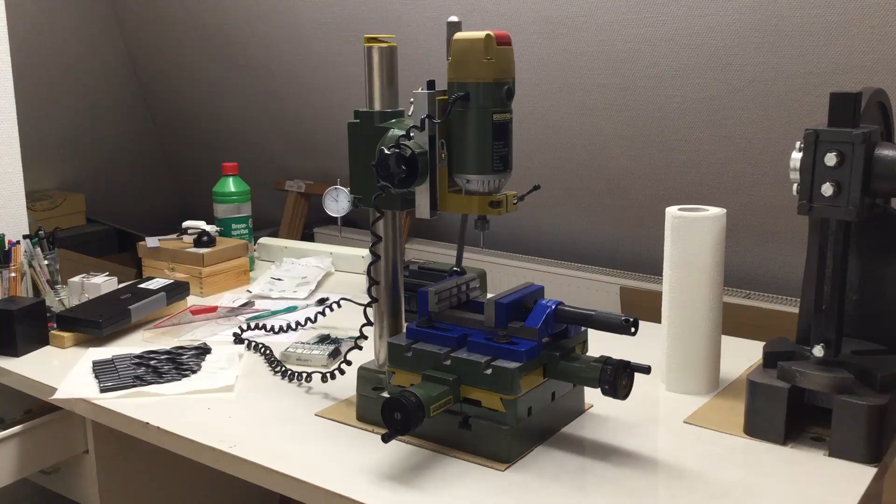We already had a small project last week where we made that little pointed shaft for visual alignment of parts on the scratched lines.

However, before we continue with our main project, I need to make, or at least I want to make, another enhancement to my Proxxon milling combo here.

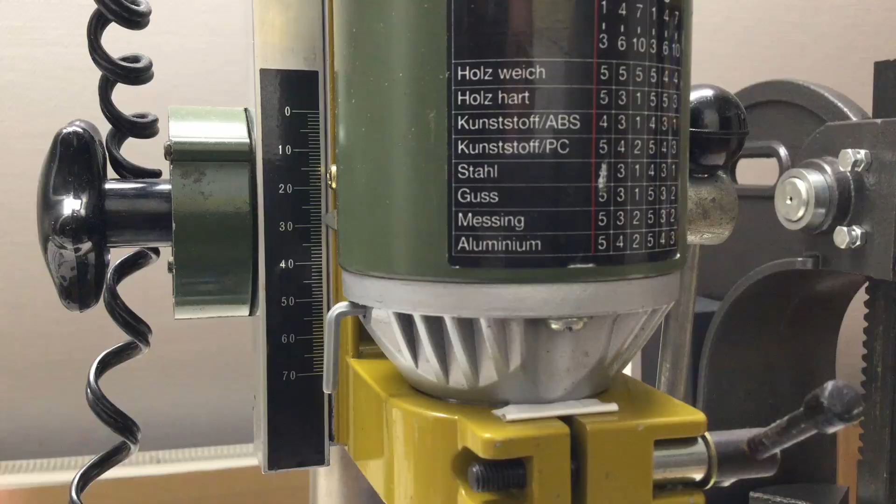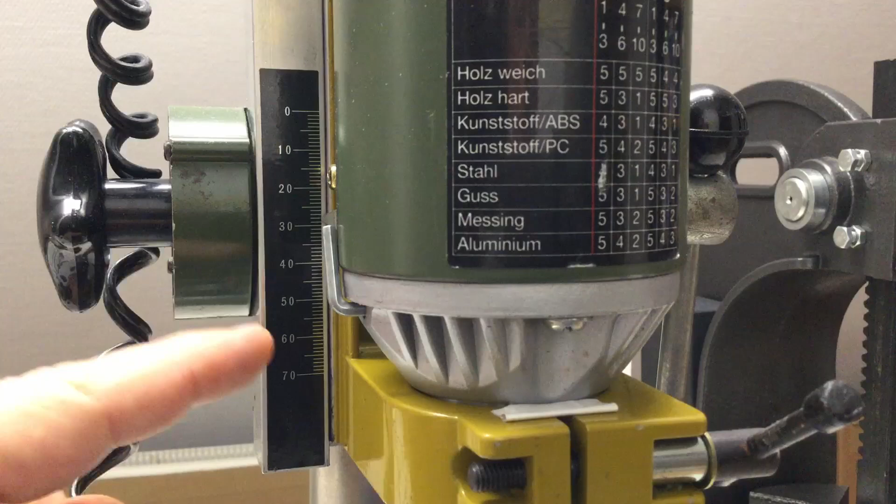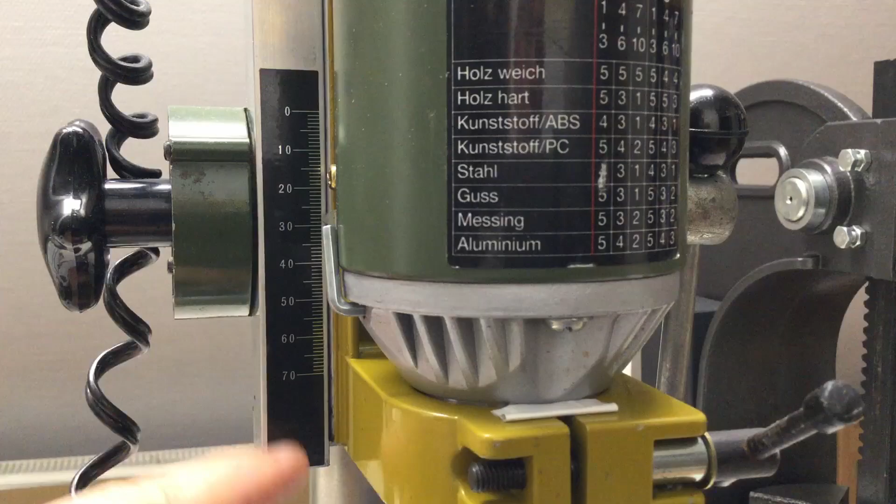The Z-axis of that Proxxon milling combo can move 70 millimeters, which is quite good. However, what if you want to drill a hole 65 millimeters deep, and maybe counting the tip of a drill, a total of 70 millimeters down? And suppose you want to do that in very fine steps, starting with 8 millimeters and slowly going up to 16 millimeters, at the end in half millimeter steps with the drill diameter.

Because officially that Proxxon milling combo, drilling combo, can only drill up to 10 millimeters, so you have to be very gentle with it.

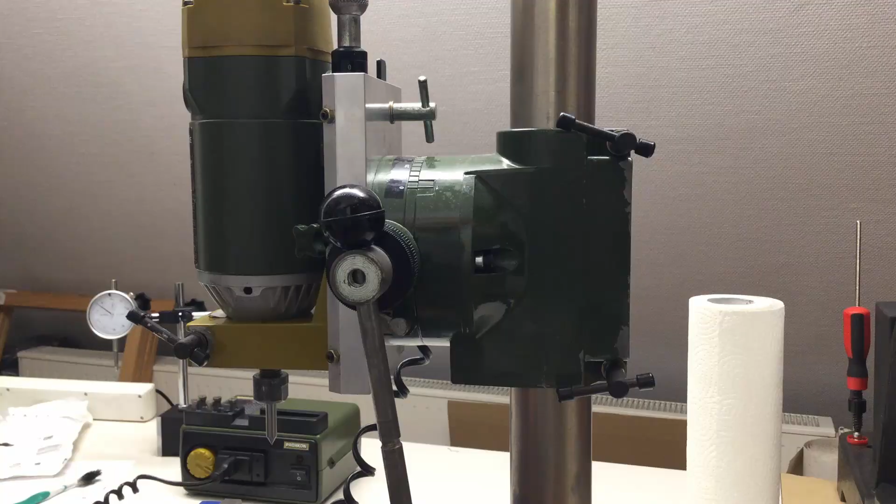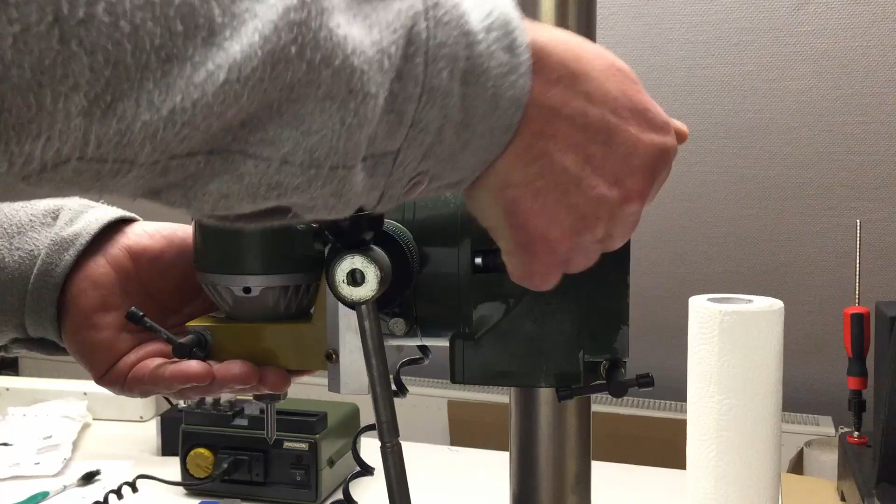But what's even more problematic is that you have to reposition the head on the column each time you change a drill. And here comes the drawback of such a small setup: that head can freely rotate on the column. There is absolutely no guide. So if you move the head up and down, chances are you lose your position on your piece. And that's the problem I want to solve today, or at least try solving it.

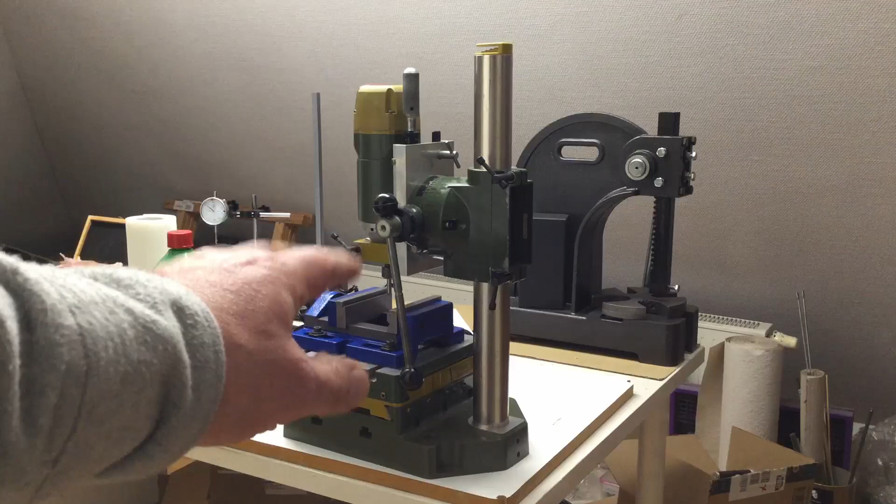As it turned out, this video will mostly be about taking measurements on awkwardly formed parts in awkward positions. So you might be able to learn something about that at least.

The quick and dirty solution I came up with for that problem is to scribe a line along the length of the column, and then have a little notch where the head is attached to the column, so you can always align rotation-wise the head to the line. Hopefully you won't get any error wiggling left and right while moving it up and down. At least that's the idea.

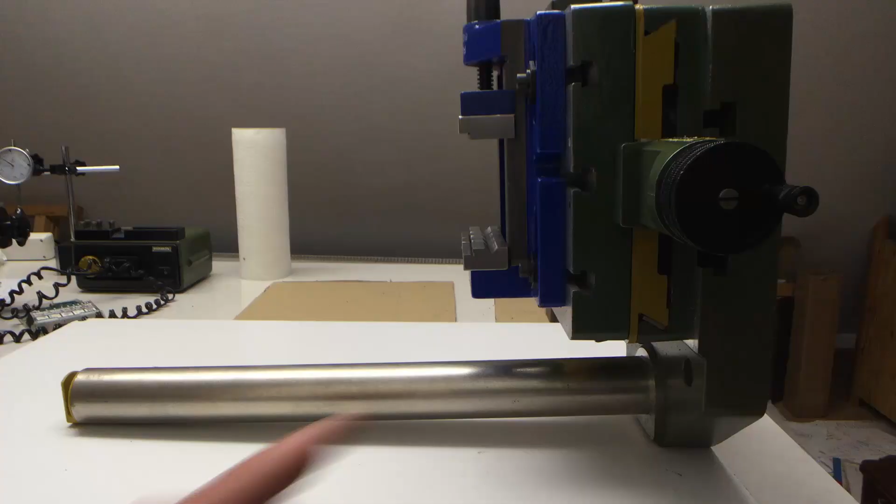Now to scribe - and I took the head off already - scribe a reasonably straight line at the radius, not a wobbly line and not a diagonal, but really a straight line on the column.

We first have to get that column parallel to a surface. Now I could take the column out of the machine, but then we are back at step 0 of tramming the whole thing, and I want to avoid that.

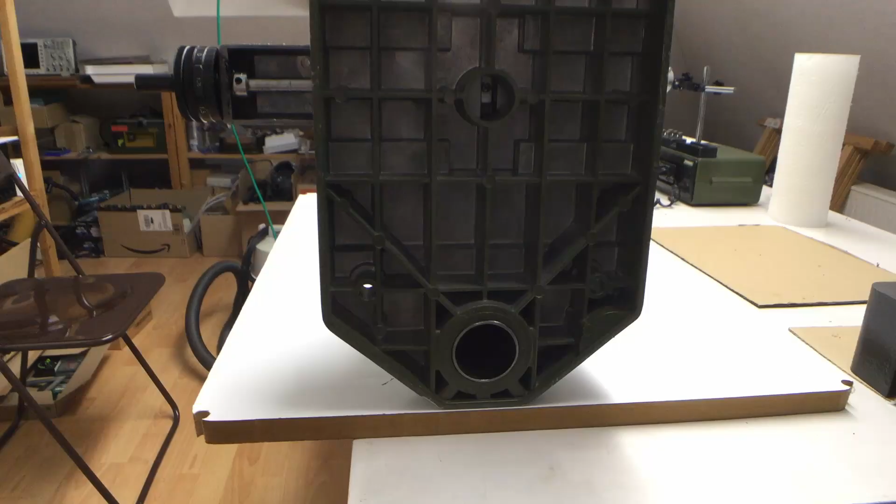So we just try to fix that to my trusty flat plate, old kitchen top, and then we go from there. The first really undesirable thing I noticed is that when we set the whole thing on that surface, it's not really stable. So first things first, we will shim that from the left and the right until it's no longer wobbling. There.

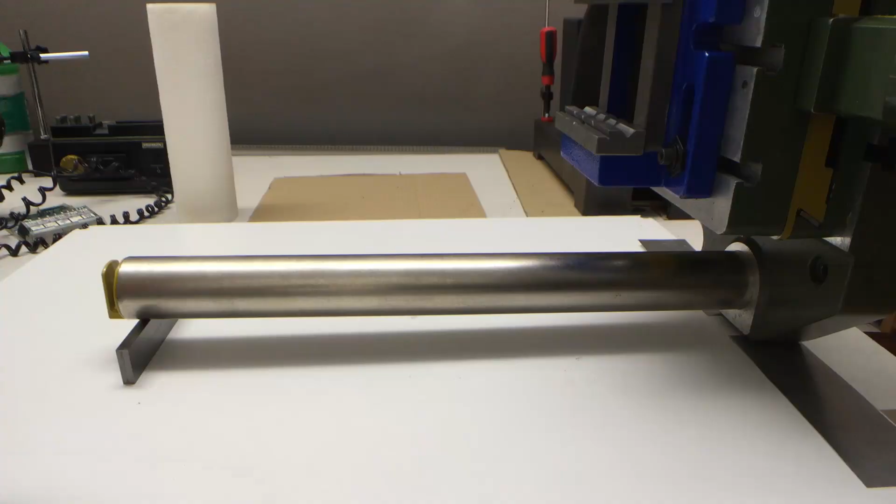And now I'm going slowly but surely through my parallels to find a pair that will support the end of the column, so it's exactly at the same height at the top as it is on the bottom.

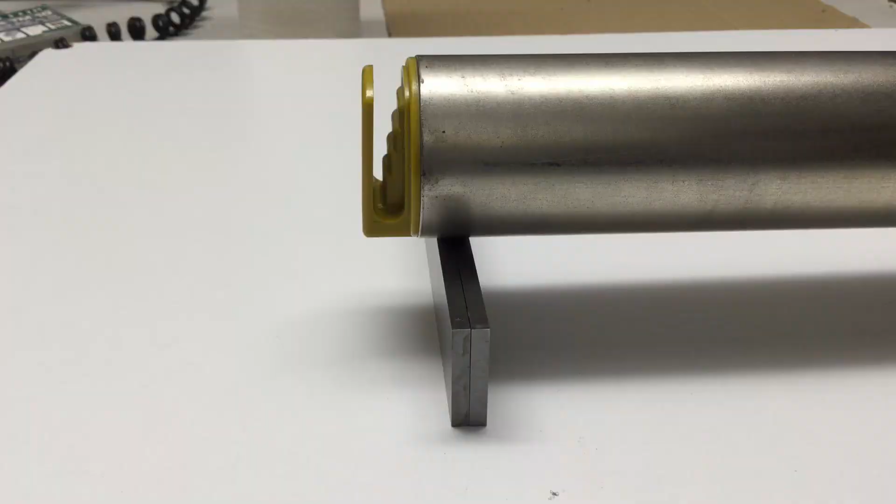Now this could be a tedious task, but there is a little trick. You see, when you have two parallels at the back, and the parallels are too high - that is, we are still leaning downwards - then the front parallel will move freely, while the back parallel takes on all the weight of the column.

So that's the first rough indication if we are really parallel to our surface - that is, the column is parallel to our reference surface here.

Reference surface, kitchen plate. The pair of parallels before were 26 millimeters and these are 22 millimeters, and you can still see the front one here is moving freely.

So we go even smaller. We're down from 22 to 18, and now that parallel takes all the load and that one can move - I mean, not really move, but it can move.

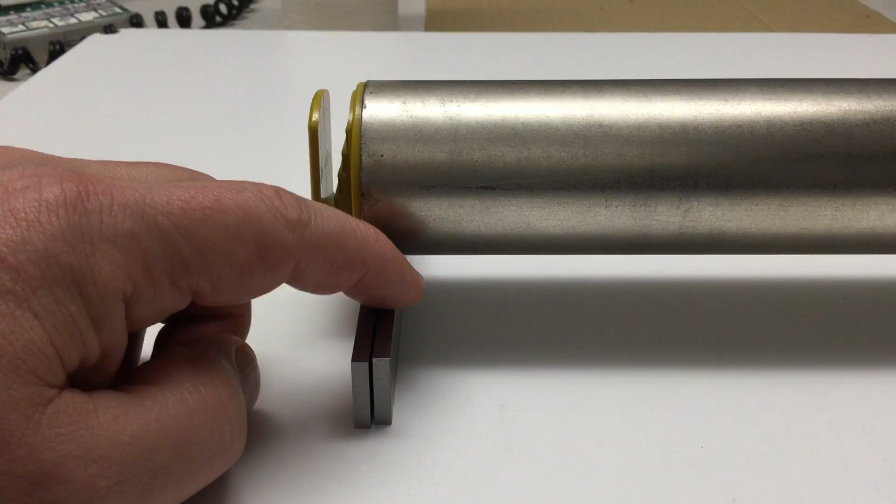That means we can now shim slowly but surely until both parallels are taking the weight of the column.

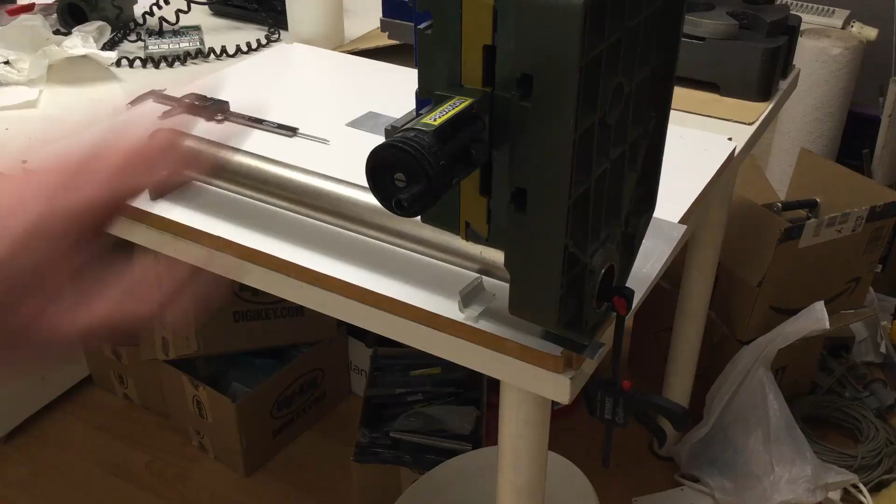I rearranged everything a little bit closer to, or quite close to, the edge of the desk now, so I can clamp down here if I need to. And I have the first clamp here also in place. This is heavy and just resting on a very small surface.

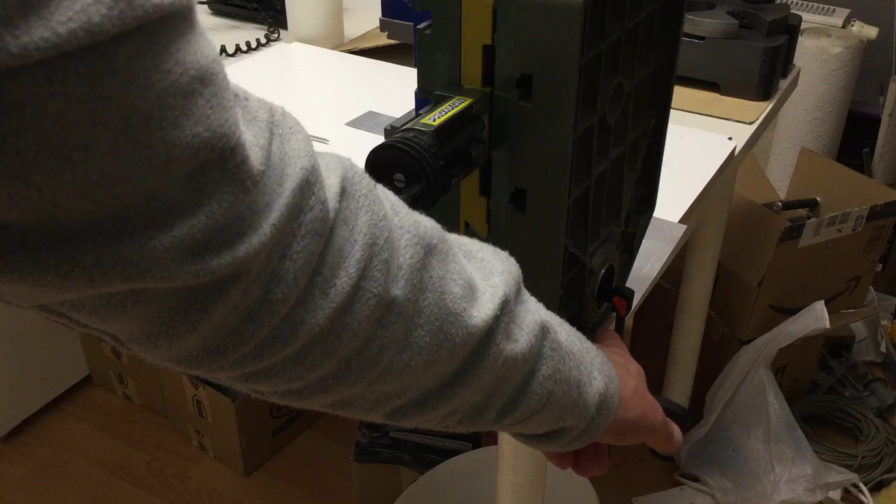I also moved the shims a little bit in and out to adjust the height. Remember, that edge is a little bit curved, so the further you get the shims together, the more you lift that up, and the further you go outside with the shims - without it still rocking - the lower the whole thing comes.

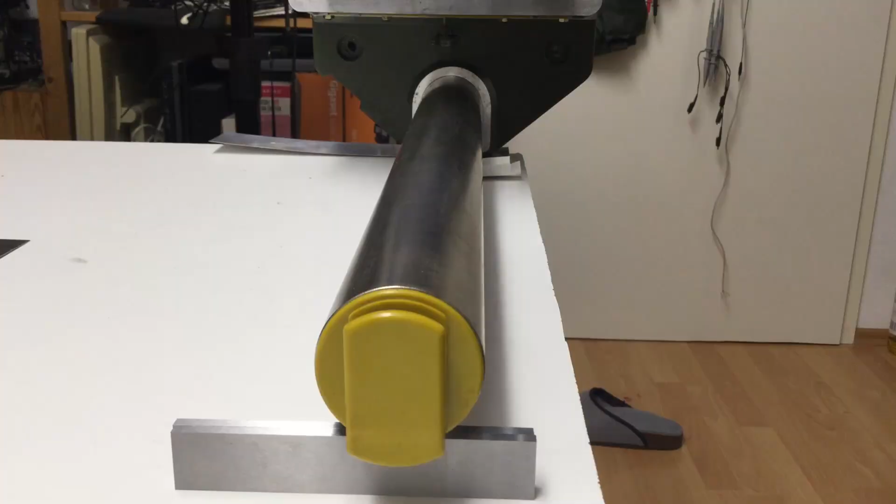And with all that fiddling around, using the surface of the caliper to go onto the desk, we're now here at the front, or at the top, at... it's a bit hard to measure that around the camera, but 49.15. Yep. And you also see there, this is no longer wiggling like crazy.

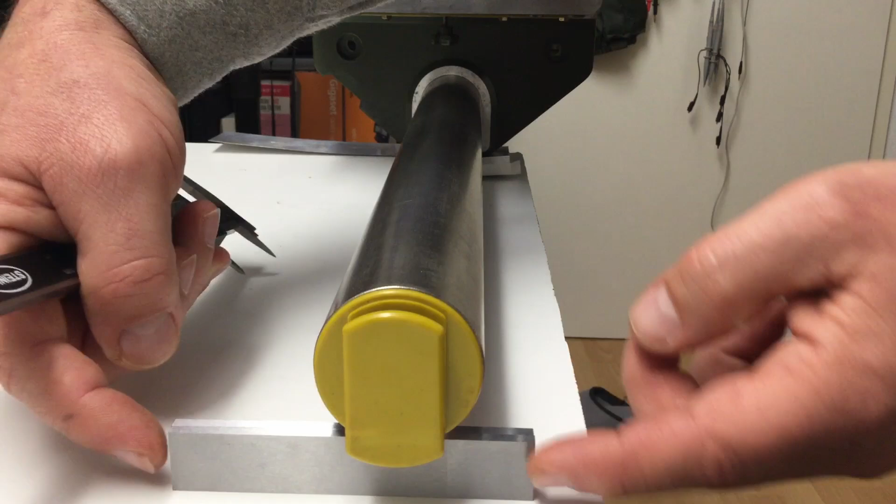There is some friction on that parallel too, while the other one is still holding the majority of the weight. But at the back, sorry, probably in the way now, but that's inevitable.

Try to make that really parallel here and on a straight angle. At the back we are at...

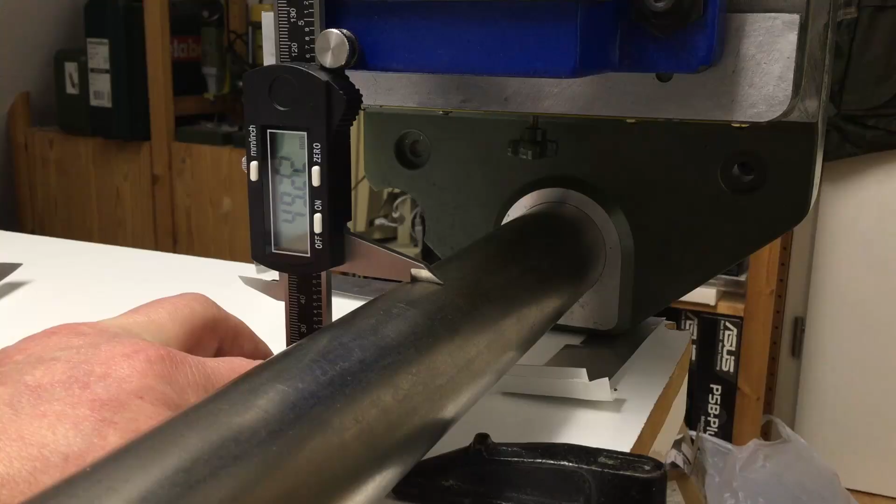48.55. After a few more rounds of experimenting with shimming, and at the end using actually tin foil for shimming at the front, and adding more clamps to make the whole setup a little bit more stable, we're now at 49.20, 49.21 at the front. And 49... sorry, losing it here.

I added another clamp to the front so nothing will move. Please note that now both parallels are firmly pressed down to the table and no longer moving. That is, both parallels now take up the weight or force exerted by the shaft, so it should be pretty much parallel to my table, hopefully.

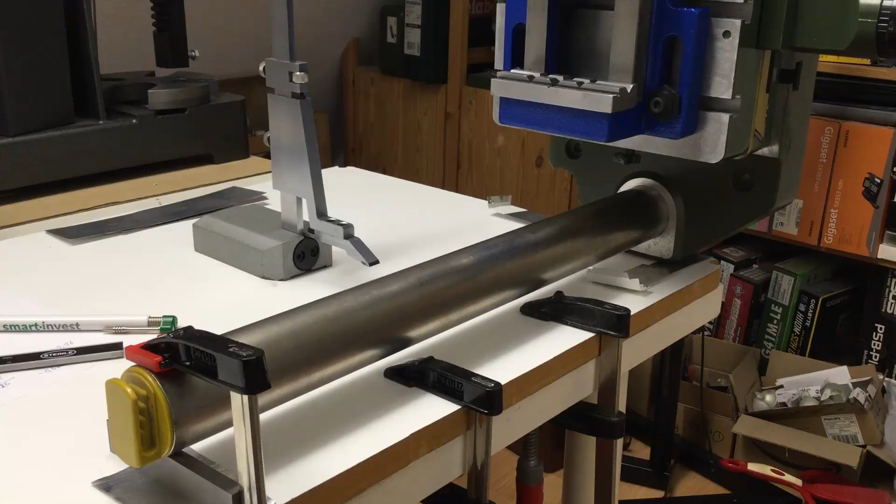Now we're almost ready to scribe a line into the side of our column with the height gauge. However, at which height we should scribe that line is the big question. I know because I measured it a lot of times before: this column has a 45 millimeter diameter, plus or minus, depending on how and where you measure.

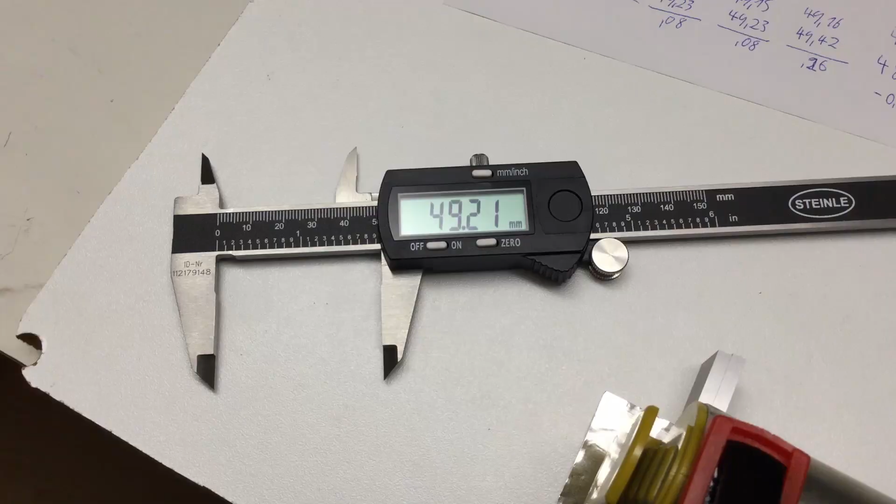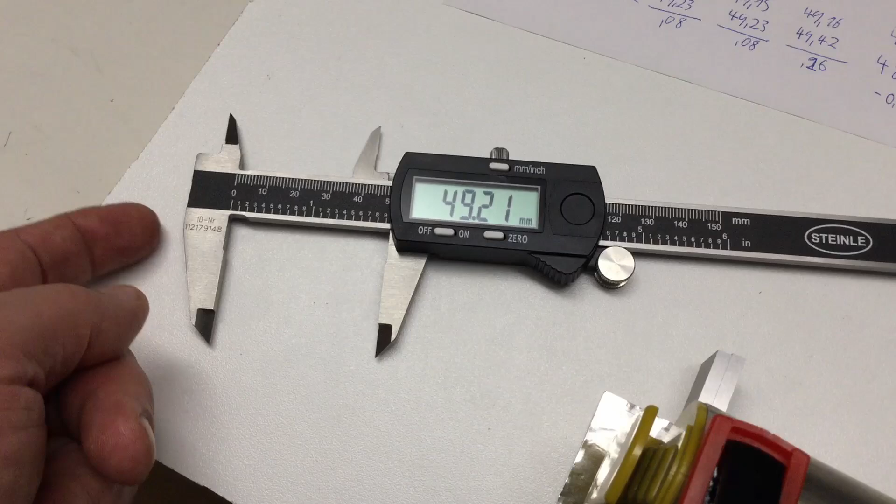Now we measured the height over our surface at 49.21 millimeters. But here's a trap for the young players: that was the distance between that surface and that surface, and that surface touched the top of our column while it's lying down on its side. However, that was our other reference surface that rested on the table. So we're missing, in the 49.21 millimeters, the distance between that surface here and that surface here.

We can measure that with another caliper. That one is not as precise as that one. Just when measuring here, make sure that these surfaces are really parallel, because otherwise you get an angle here and then you're not really measuring correctly.

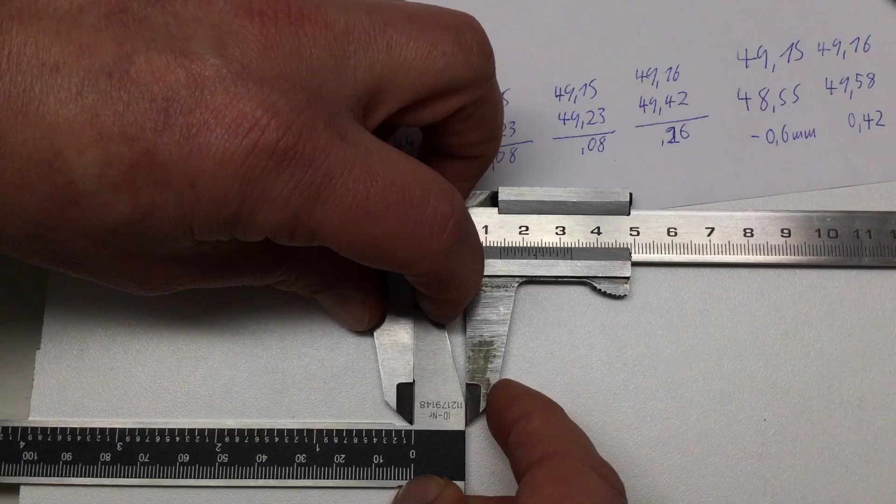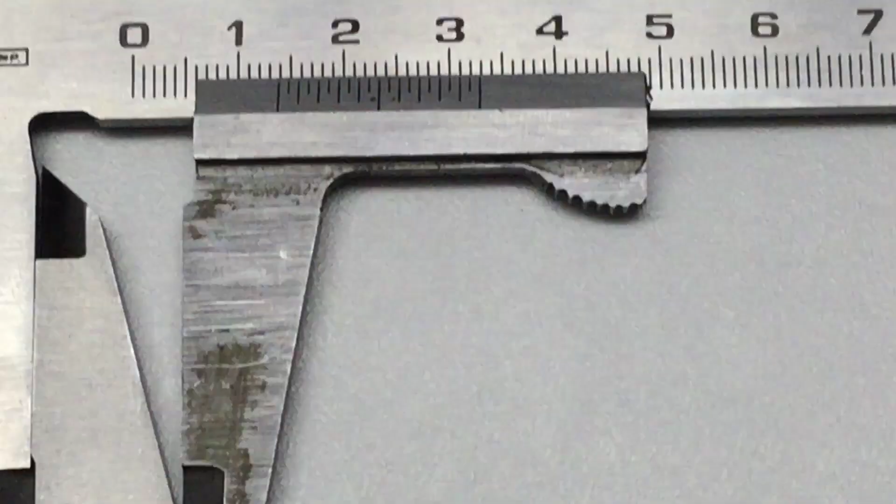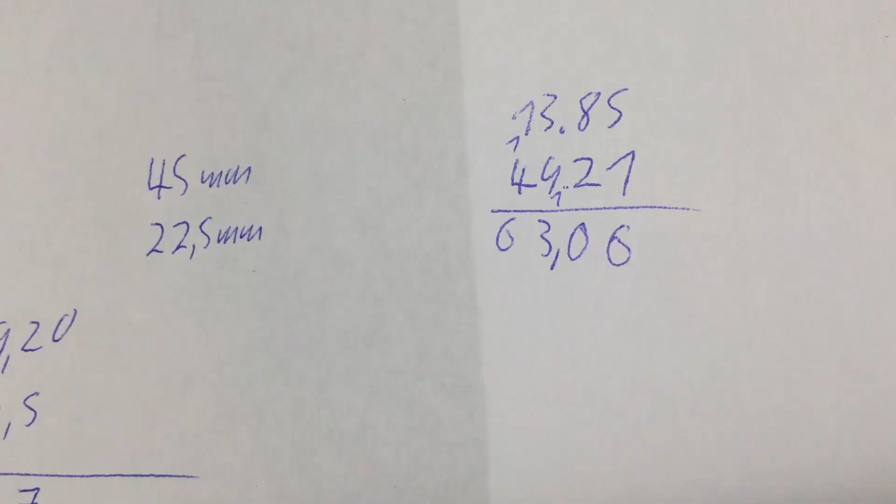That's it, and we are at, let me see... 13 point, okay, parallax error. Watch out, sorry, shake cam. 13 point - I'm really sorry about that, but the workbench is full. 13.85, I'd say. Yeah, we are somewhere here, so that's the 8, that's the 5.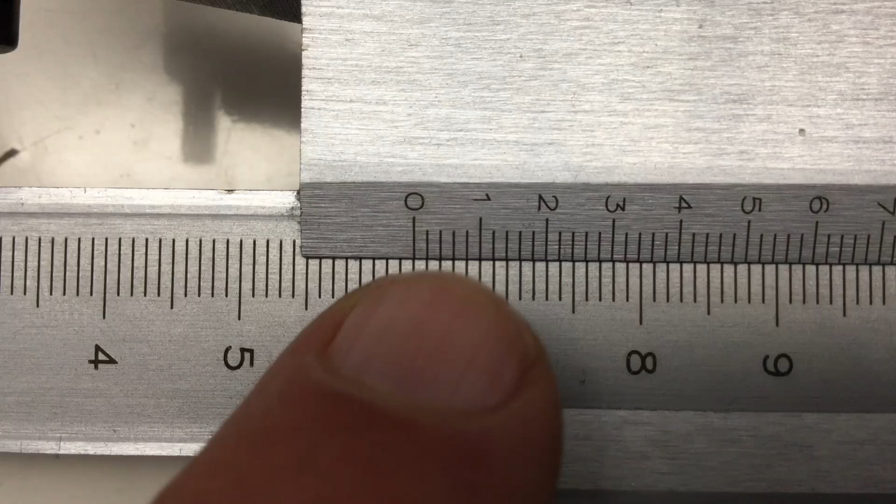So 13.85. We add the 13.85 to our 49.21, and this is, if I did it right, 63.06. So I set my height gauge to 63.06, and each of the small ticks is 2 hundredths of a millimeter, so 3 ticks up, and yeah, I think I nailed it pretty much. But that was a clumsy, indirect method involving my old calipers.

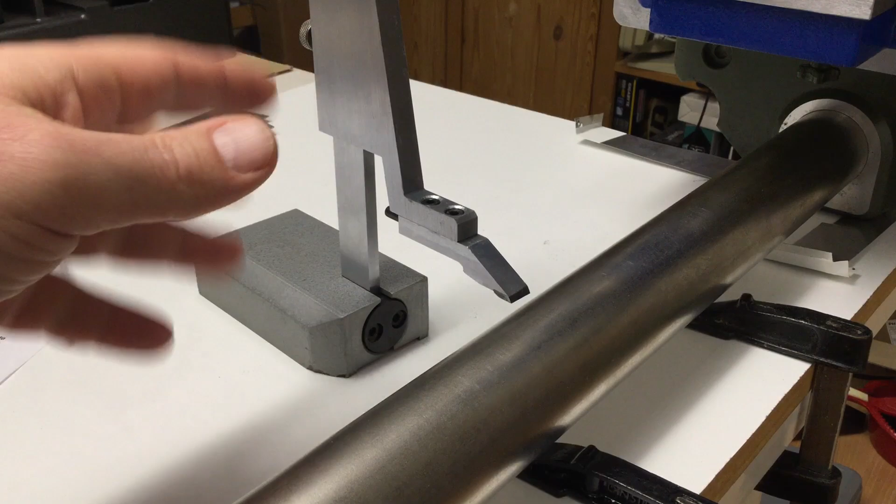So just as a sanity check, I'm trying now to go over my workpiece, and no, I'm colliding here. So what we do instead, we do blindly. Sorry, you probably can't see that. Let me refocus - I'm getting a little bit up.

Okay, now I'm clearing completely. So we're going a little bit down again. Still clearing, down again. Still clearing, down again. Still clearing, but we're getting close. Let me zoom in on the tip. The goal is to have the tip just touching. Anyway, we are close - can I zoom in a little further? We are close, but no cigar.

Okay, now I'm just touching. I cannot feel it, but I can hear it - have a listen. It doesn't even really scratch the metal. So yeah, we are now at the right height, and now we can read the result.

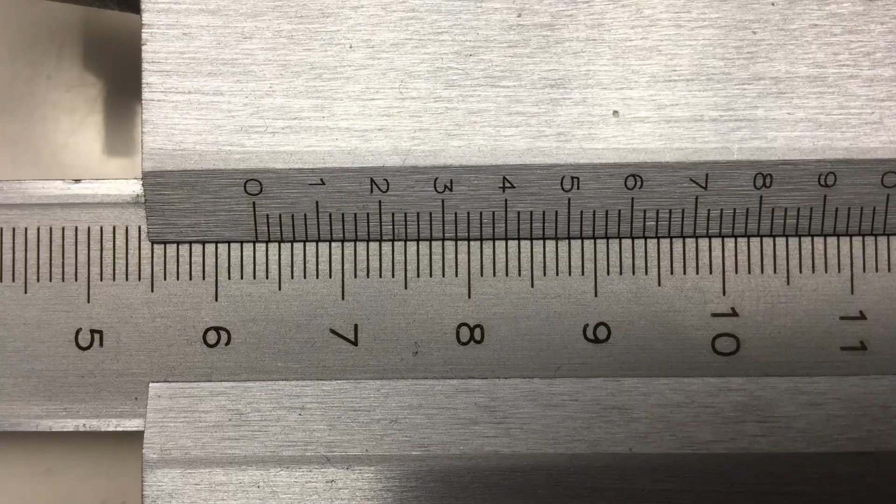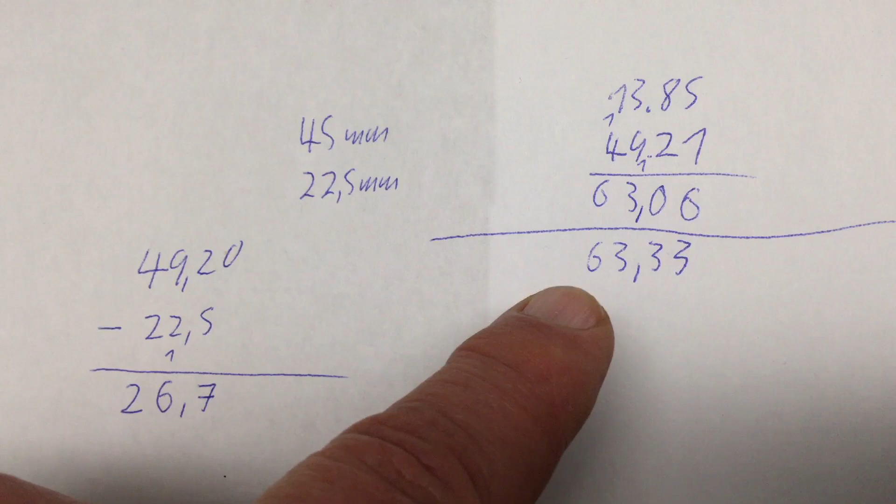That's 63 point... where's my finger? 32, 34, let's call that 33. So our first result, which was obviously too low, was 63.06, and now with a height gauge we measured 63.33. So we were 0.27 millimeters off. That's quite a bit, and that happens when measurement errors add up.

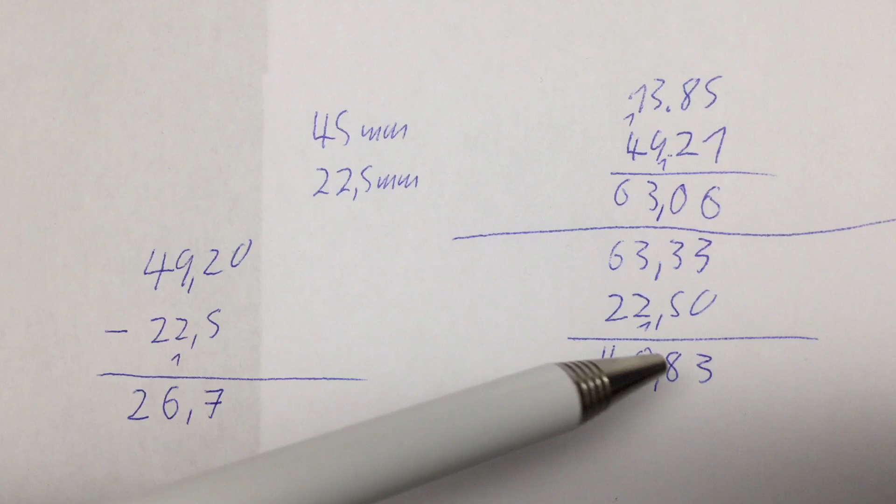All that's left to do now is to take the diameter of our column, 45 millimeters - I already mentioned that - divide that by 2, so half the thickness of the column, or the radius, is 22.5 millimeters. Then we subtract the 22.5 millimeters from our 63.33 millimeters, and we will set our height gauge to 40.83, so either 82 or 84 or a little bit in between.

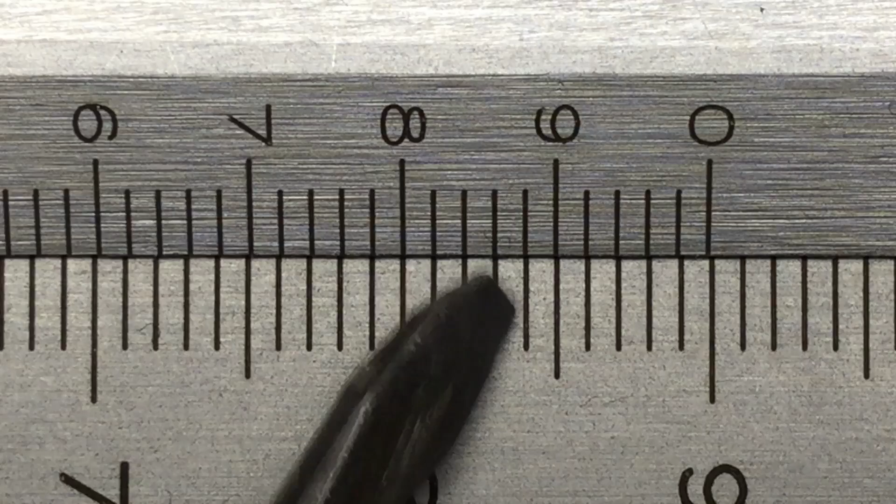So I dialed in 40.83, hopefully, so we are somewhere between 2 hundredths and 4 hundredths over 0.8. And all that led to this exact moment in time where we can actually scribe the line here on that side, because obviously I have no space on the other side. Whew, wish me luck.

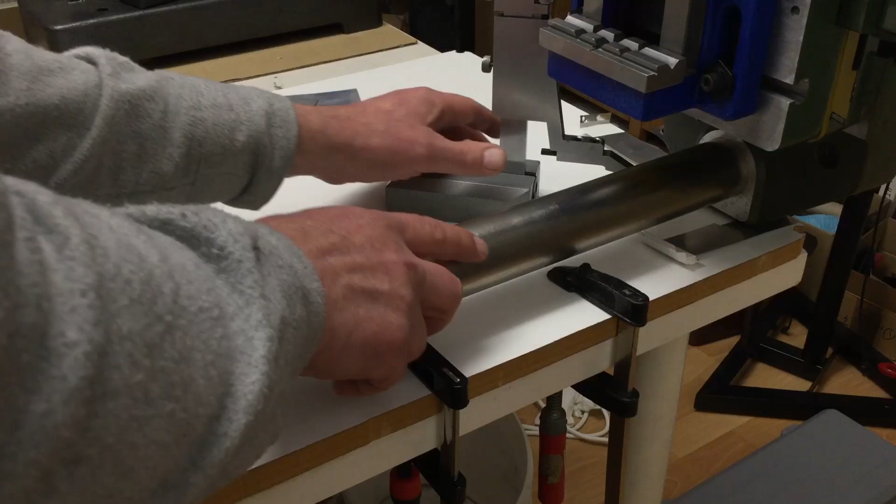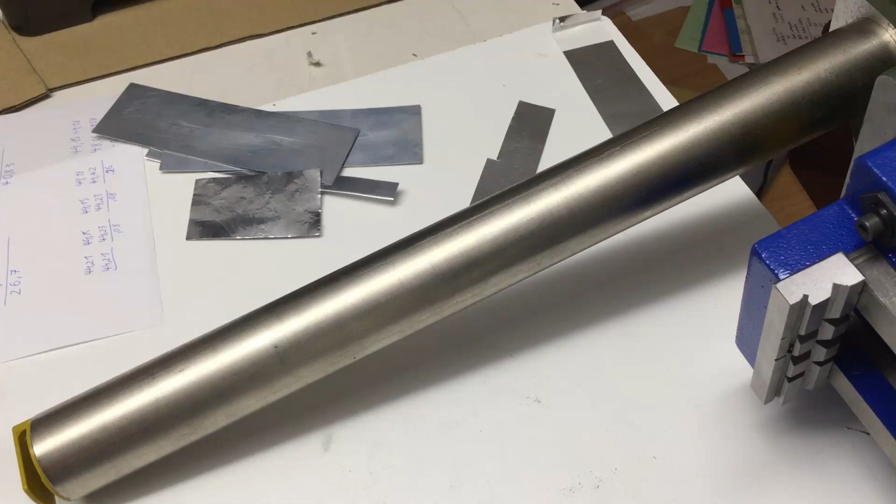And now we'll turn that thing around and have a look at the result. Yep, the line is definitely there, okay, but you can of course barely see it. It really depends on the lighting, so we will have to do something about that too.

And the first step is to take a paint marker, so not a normal marker, but something that really contains paint, and try to get some paint into that hole, that slot.

Okay, that's almost good, but not quite. If you go over it, you can actually feel now a little ridge on both sides of where we scribed the line. We will remove that with a stone.

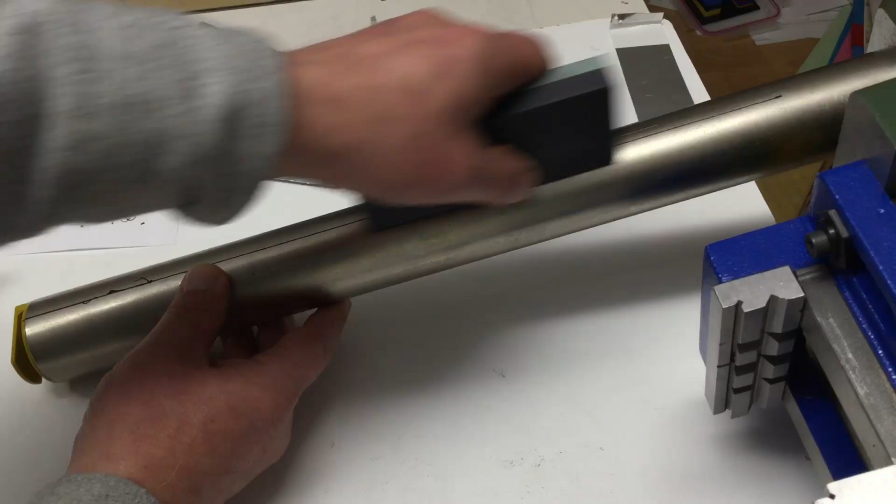Just taking the stone very lightly here, and feeling if the scratch is still there. And if it is, a second pass.

Yeah, that's good enough. And finally, I have here a piece of wood, which I just put some kitchen tissue around, with some alcohol, and we use that to polish a little bit. And you see the line is getting thinner.

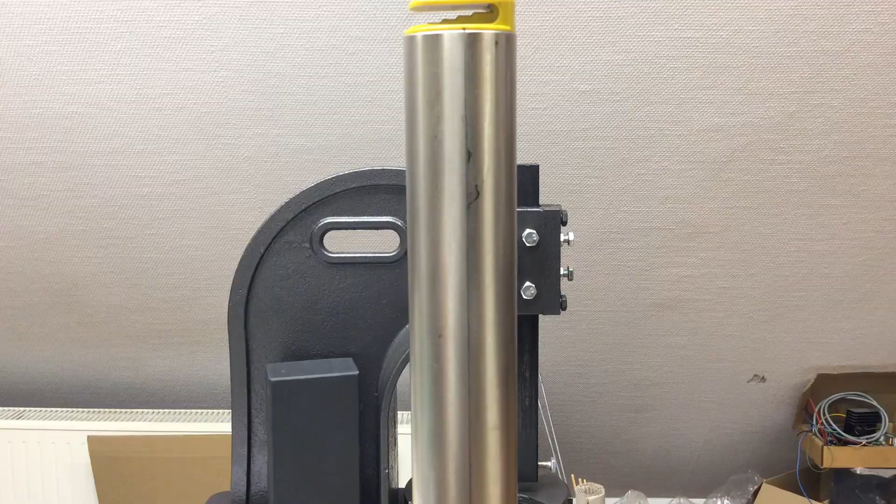Maybe I was a little bit too aggressive. The idea is, and you can already see it, that it's much more visible now. The idea is to just have a little bit of black color at the bottom of the scratch, so it's easier visible. And in the end, you should have a very well defined fine line along the whole column. It's a little bit better down here. That looks better, but it's okay.

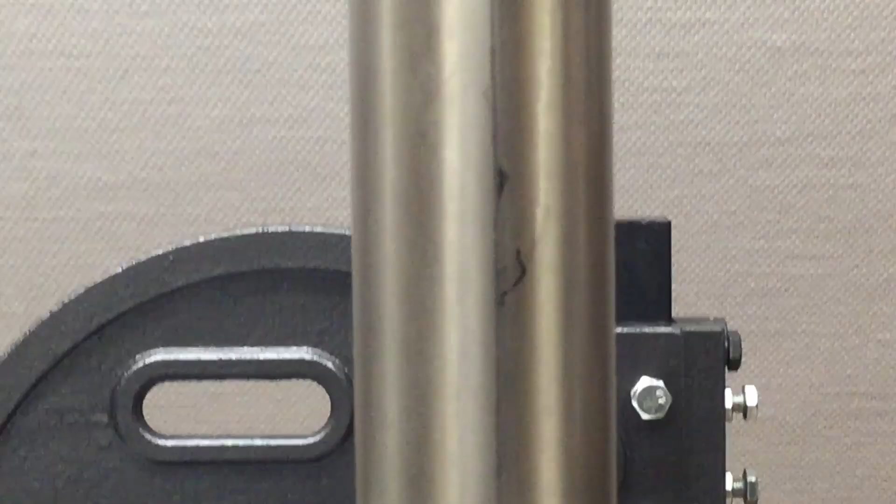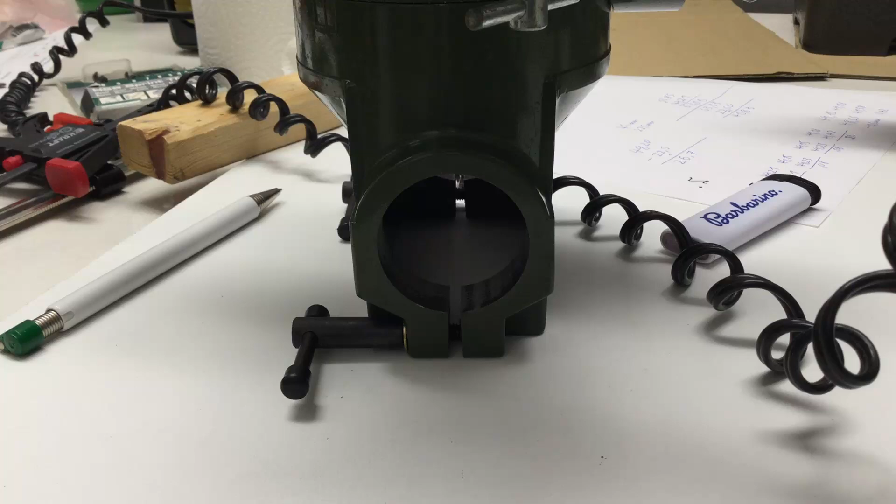I could take off a little bit more ink at the top, and maybe I'll do that right now. The next step is to create some markings on the head itself, through the center of the bore. We know that the diameter here, at least when it's clamped down, is pretty much 45 millimeters. So the question is, how high above our plane surface do we have to make that mark?

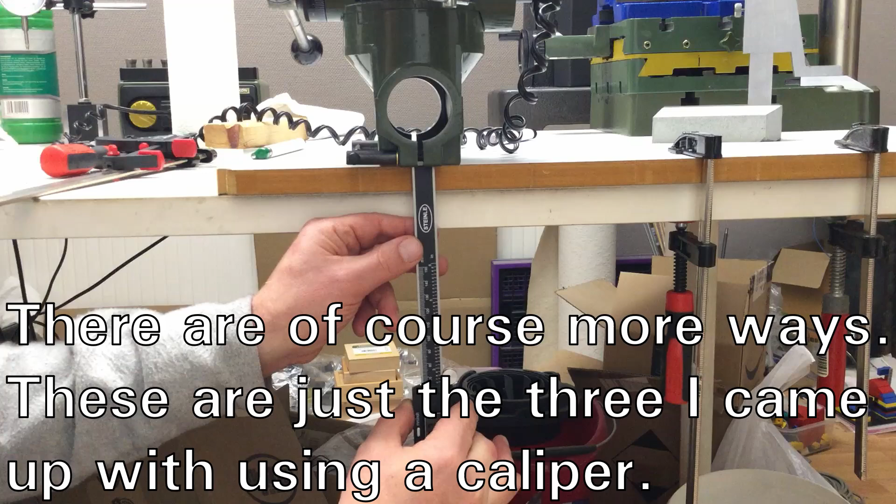There are basically three ways to measure that. The first way is to measure through the slot, not exactly at the front because it's a little bit round, and go up until we hit the center, keeping everything nice and parallel, then wiggle a little bit, and we are here at 62.61, 64, 65, 66.

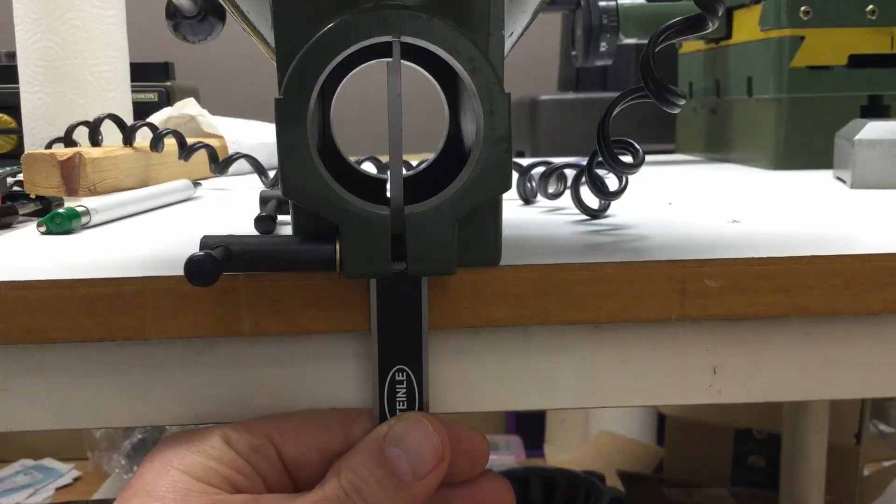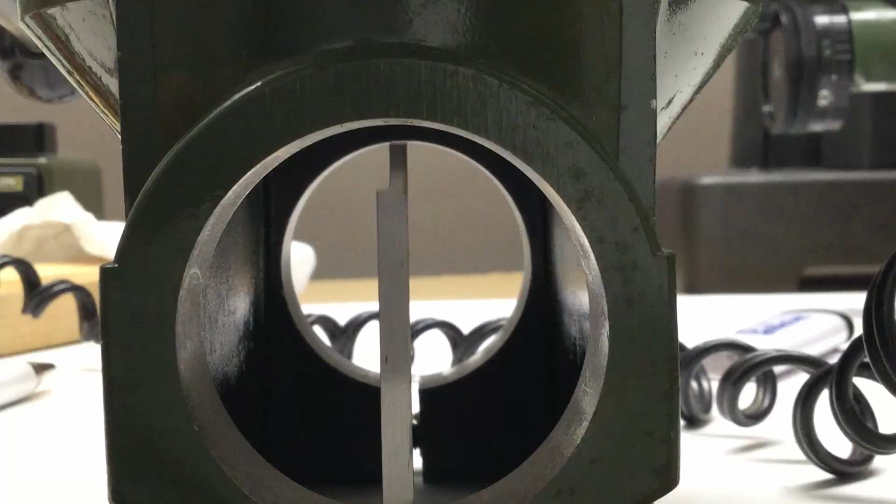Please note that there are many error sources here. For one, that wiggle would change your measurement, and also on the other axis, that would lengthen your measurement if you wiggle that way. And if you don't hit exactly the center at the top, your measurement would get shorter. But there's a third error source: our tip here is square and not really a tip, so we might miss a few hundredths on the radius.

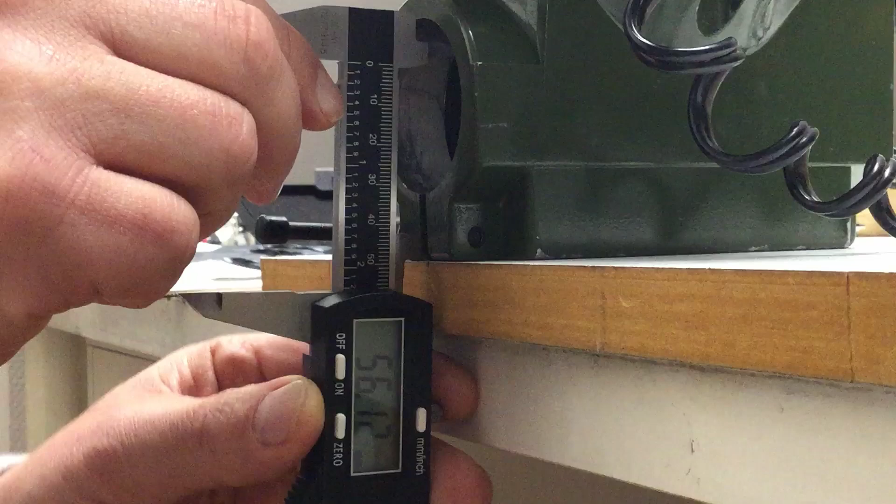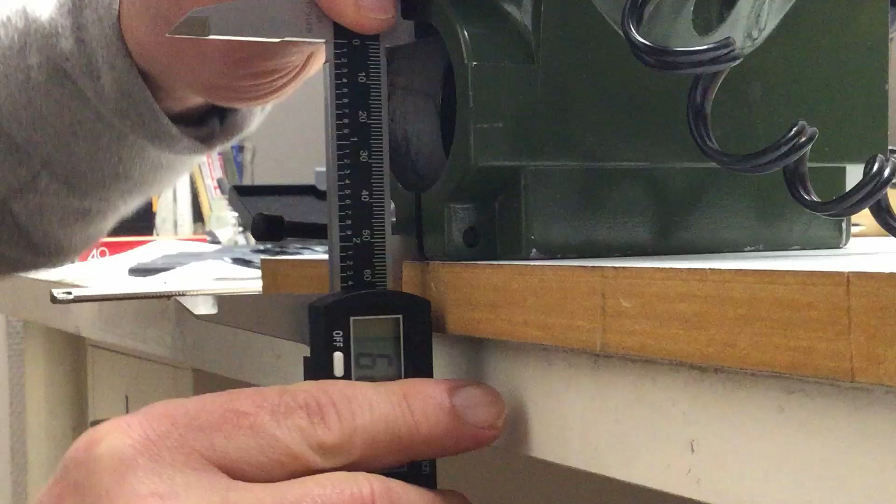The second option is to take our blades for inner diameter measurements and use them to determine the diameter or distance. And here we come to, I cannot even read that, 62.4748, sorry, I'm in the way, 5554, something like that.

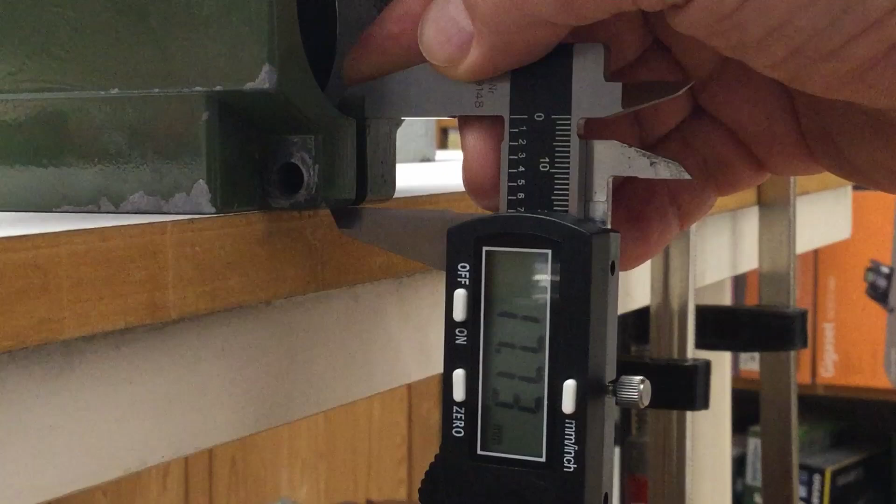The last option is, of course, to just measure the thickened portion where the clamp goes through, and there we have to be at the very edge. So this is very error prone. Oops, sorry. We come to 17.89, no, I'm too far from the edge. 17.50, yeah, 17.50.

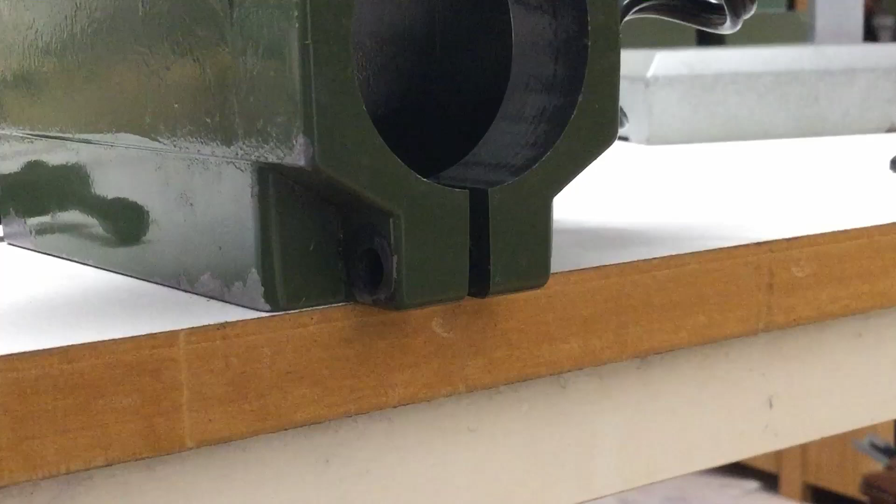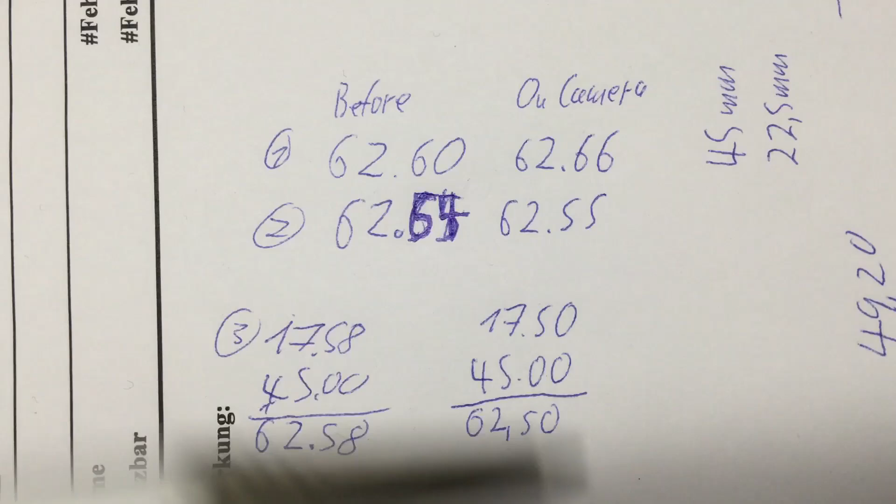The error source here is, of course, that we are not exactly measuring at that edge, and that we are not really measuring at the very center, but a little bit offset where our curve is already rising. So now we've taken three different measurements, and for method number three we have to add 45 millimeters, the inner diameter. On camera I showed you 62.66, 0.55, 0.50, and in preparation, without working around the camera, I took some measurements and came to 62.60, 62.54, and 62.58. So three different methods, two measurements each, all a little bit different, within a few hundredths, plus or minus.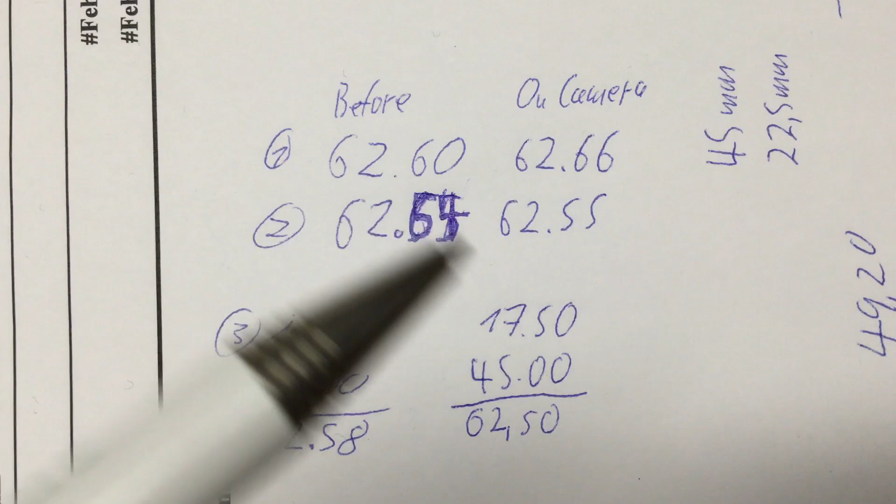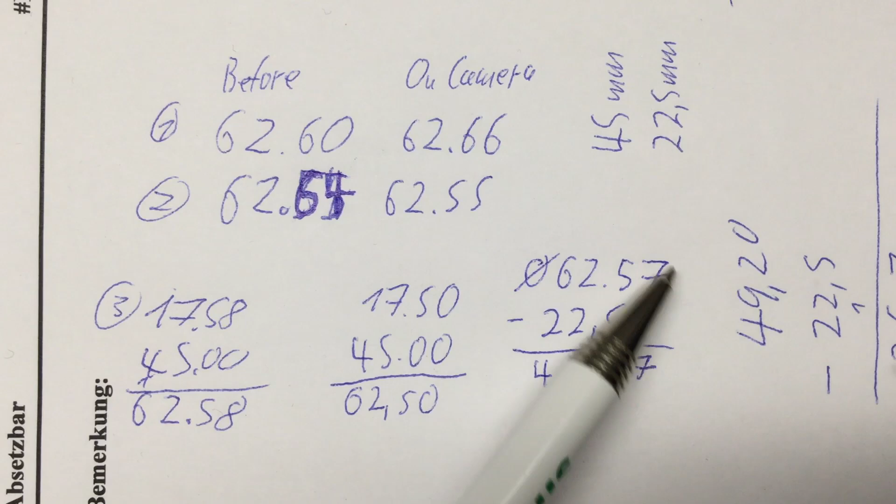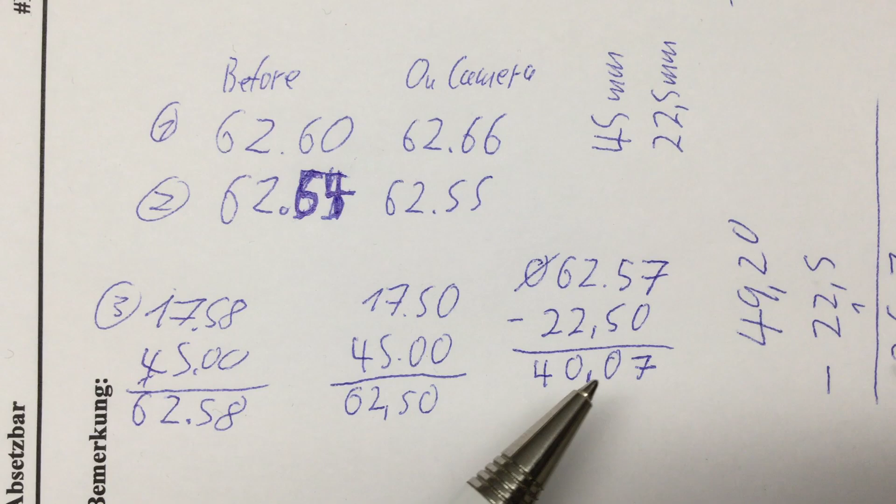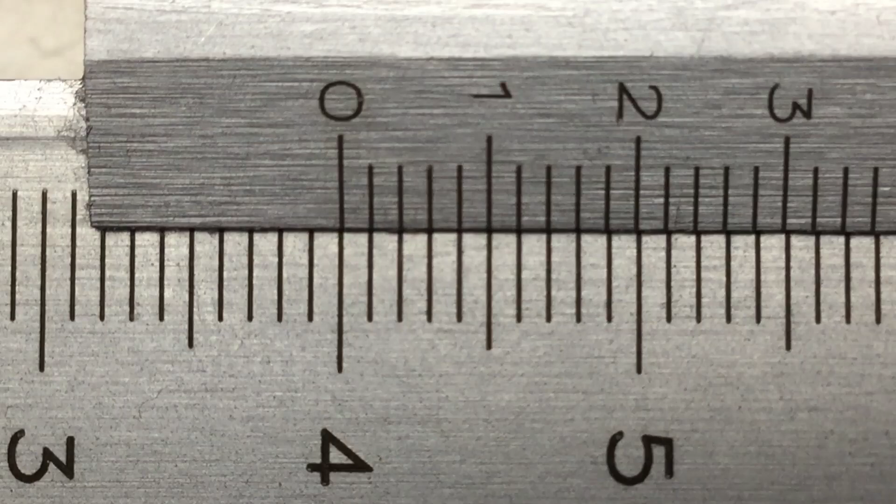I dialed in, where's my little finger, 40.07, so between the 006 and 008 mark on the dial gauge. I hope I did that right. And now we do some scribing. The height looks about right, so I just do two light scratches here.

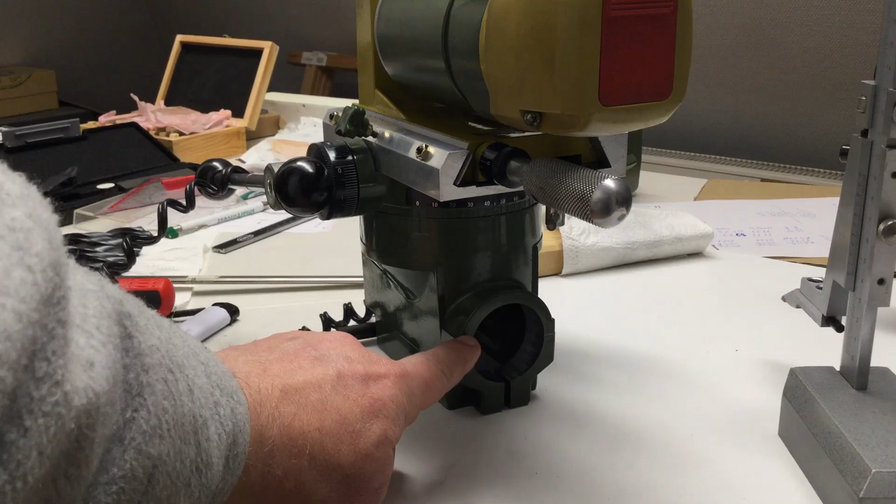And now we first sand off the green paint around these spots, because I want a black line on a metallic background and not a black line on a dark green background.

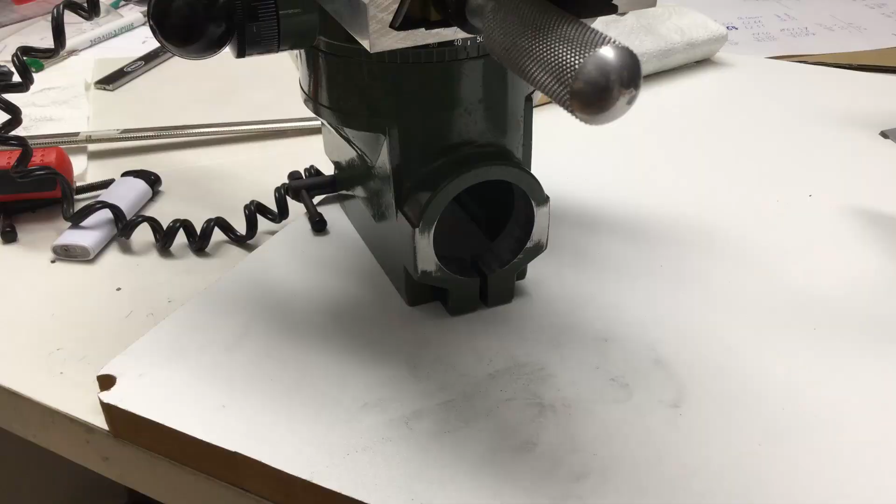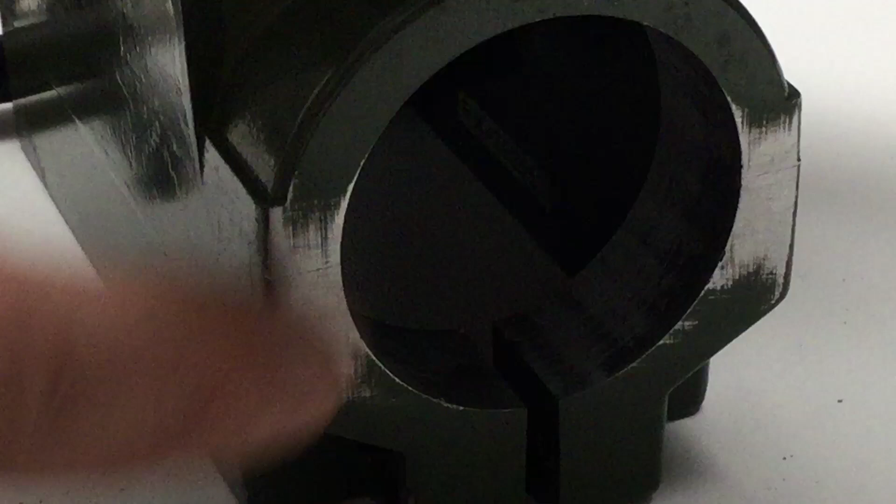And now we scribe again, but with a little bit more force. Wonderful. As before, we fill the scratches up with some ink. We remove any burrs we created. And you can already see the line.

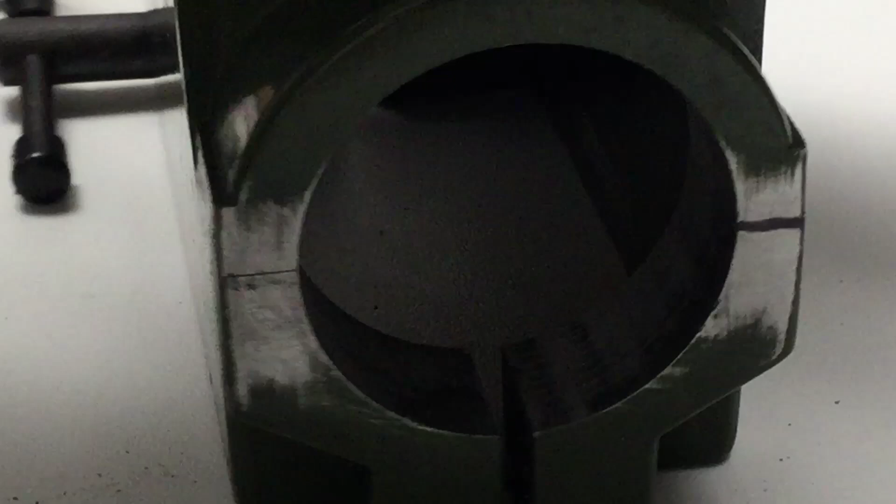Yeah, perfect. And the other side too. Not that we need it on the other side, but yeah, two nice little lines.

And some tissue and alcohol to take care of the rest. Oh, I think that was too much. Or was it? Let's see. Yeah, on one side it was too much, but I still have here, that's the side that counts, I have that little black thing. So yeah, I took off too much, but that's okay. That's enough, and I can always touch up these markings if I need to.

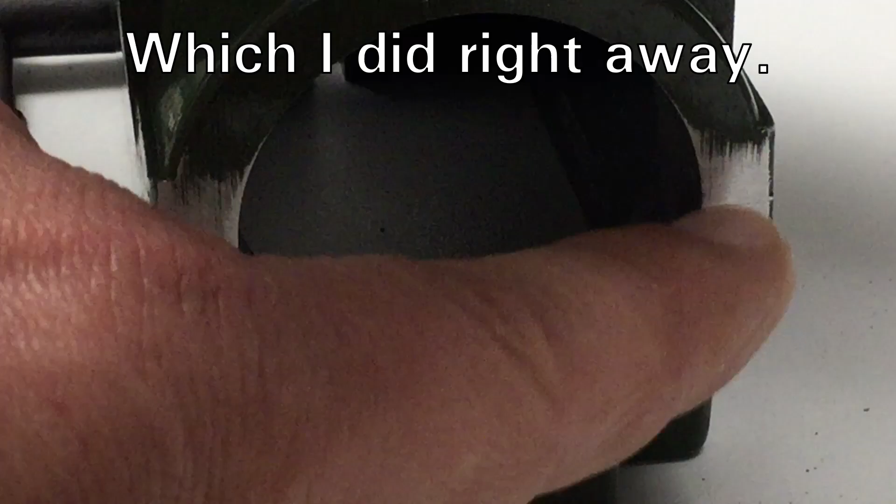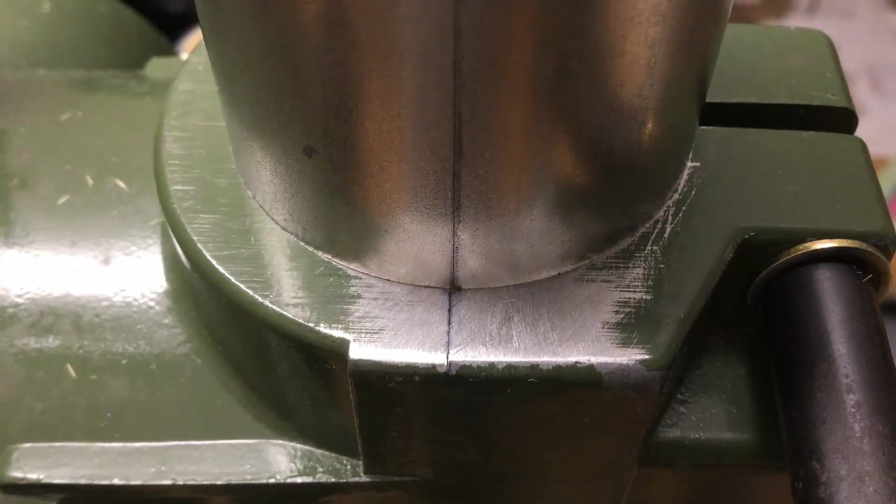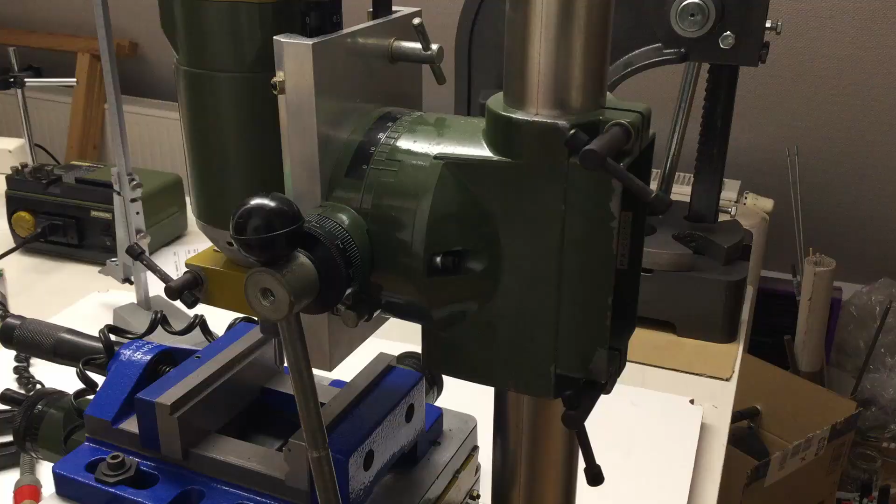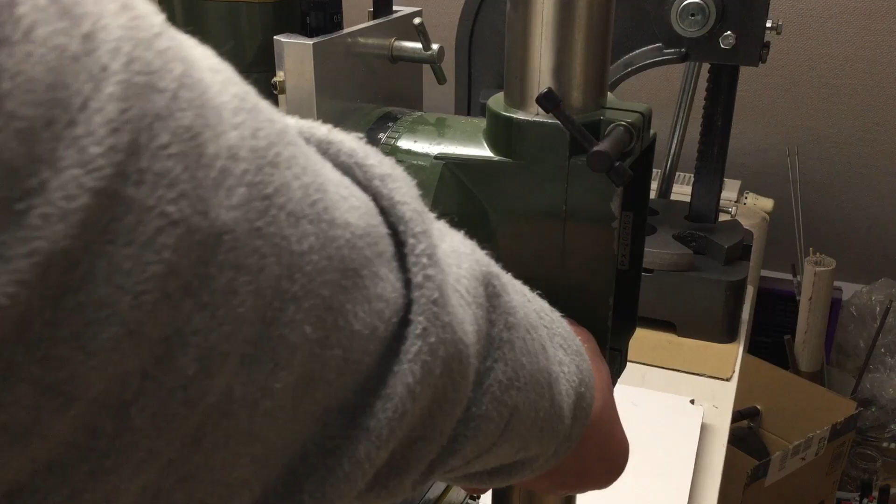That was superfluous anyway. And now we should be able to zero the angle of the head around the column quite accurately. So I almost hit it. Yeah, we're a bit off, but I can hammer the whole thing until it's perfectly aligned. And of course, afterwards, we torque it down to the max, so the head really can't move anymore. After torquing down the screws on the head, we make sure that really everything is still aligned, which it is, which is a good sign.